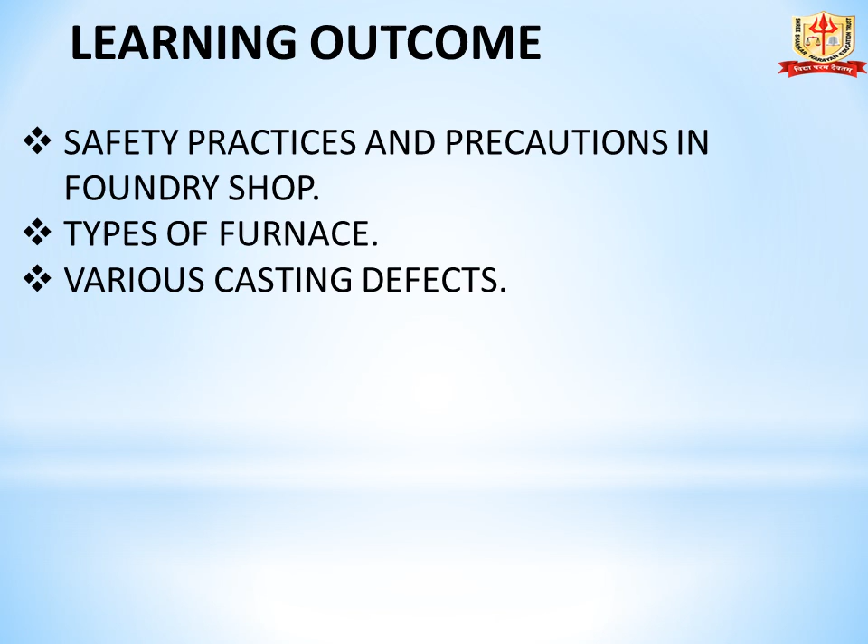Today we see the third chapter, Casting Processes and Plastic Molding, Part 4. Learning Outcome: after watching this video, you should be able to know safety practices and precautions in foundry shop, different types of furnaces, and various casting defects.

In this slide we study safety practices and precautions in foundry shop. First precaution is use personal protective equipment: use heavy cotton suit to protect against hot gases, dust and burn, use safety shoes, and workers should always wear full face shield and safety glasses to reduce or eliminate the risk of eye or face injury.

Second precaution you should take is reduce impurities in metal. Molten metal emits fumes, and any impurity on the surface of the molten metal increases the risk of breathing problems. So metal used should be in a pure form. Impurities also increase the dross that must be removed, thereby increasing the workers' exposure to harmful substances.

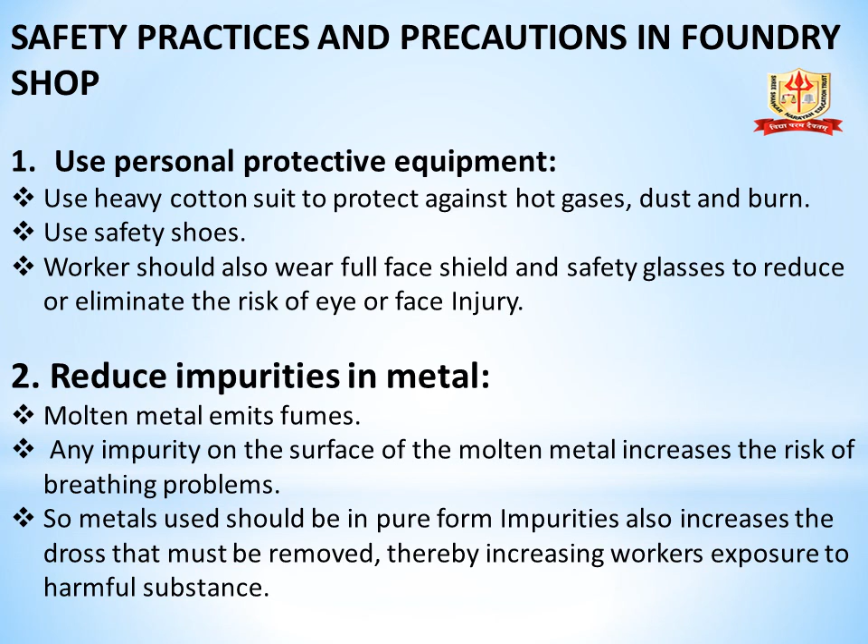Third safety practice is know your melting. Different metals have different characteristics like melting temperature. Alloy elements like lead, zinc, mercury, beryllium are especially dangerous. It is better to know the health risks associated with handling these elements before exposure happens, so take all necessary precautions before handling them.

Fourth point, inspection. Check the condition of equipment, condition of furnace wall, fuel lines, burners and pouring equipment regularly and do the periodic maintenance of it.

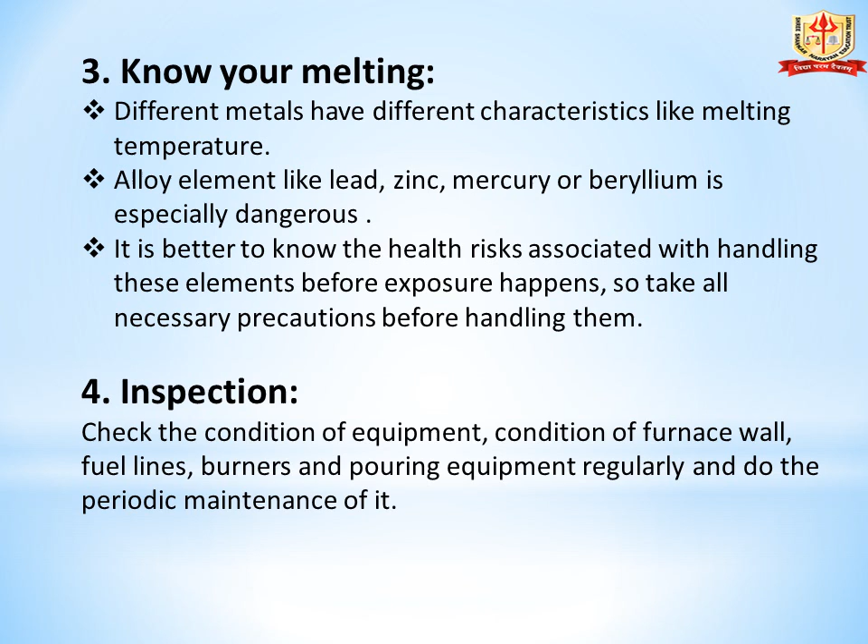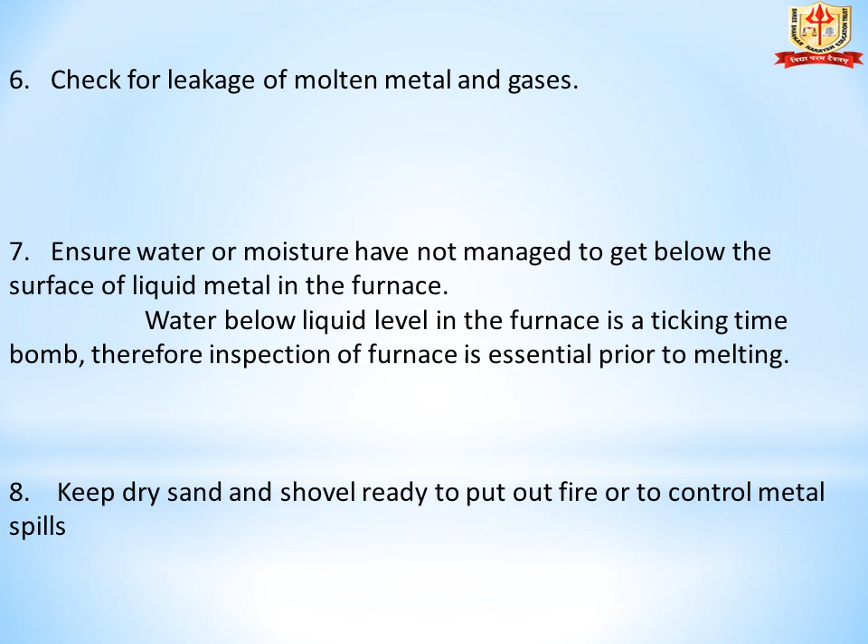Point number 6, check for leakage of molten metal and gases. Point number 7, ensure water or moisture has not managed to get below the surface of liquid metal in the furnace. Water below liquid level in the furnace is a ticking time bomb, therefore inspection of furnace is essential prior to melting. Point number 8, keep dry sand and shovel ready to put out fire or to control metal spills.

Next safe practice, point number 9 is first aid. Despite the best planning, precaution and care, sometimes accidents happen. It is advisable to be prepared for the worst. Basic first aid may need to be administered before help arrives. The workplace must have a working phone to call for emergency services.

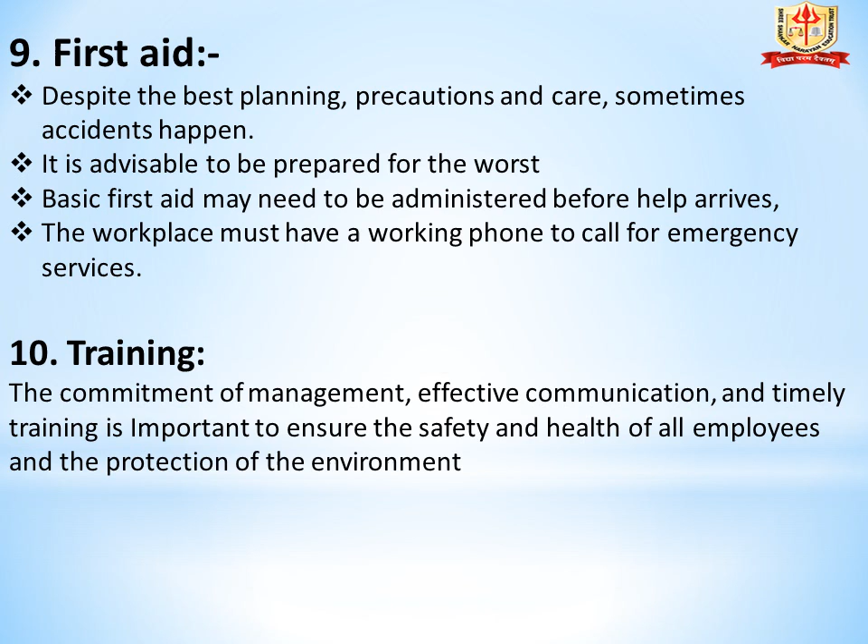Point number 10 is training. The commitment of management, effective communication and timely training is important to ensure the safety and health of all employees and the protection of the environment.

Next point is melting processes. The selection of furnace depends on following factors: temperature of molten metal required, rate of molten metal required per hour, method of metal pouring, and economical considerations such as initial cost, running cost, fuel cost, etc.

Point number 5, cleanliness and noise level. Point number 6, quantity of metal to be melted at a time. These are some factors by which melting processes are selected.

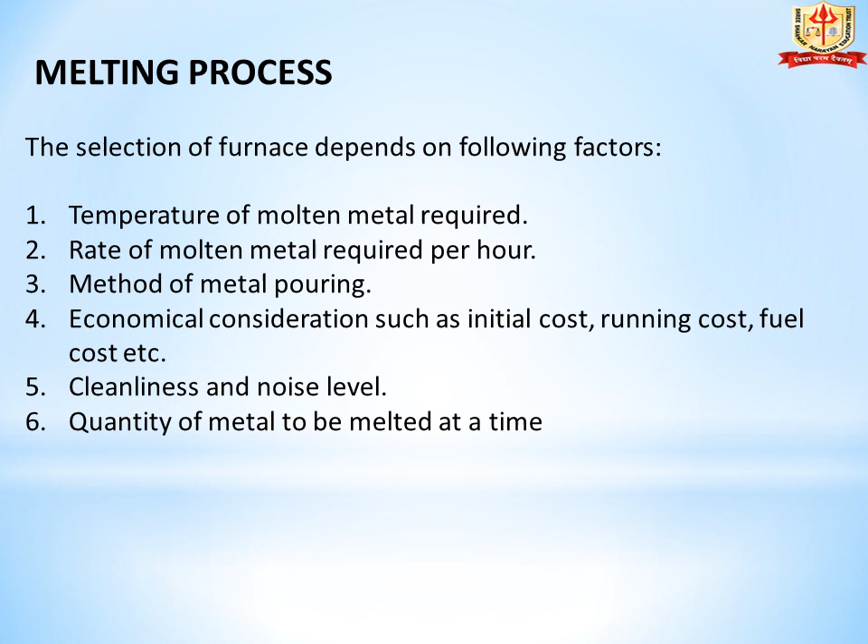Now we see types of furnaces. For remelting metal in foundries, the following furnaces are used: first is a crucible furnace, which includes pit furnace (coke fired furnace) and tilting furnace (oil and gas fired), second is metal pot furnace, and third is a cupola furnace.

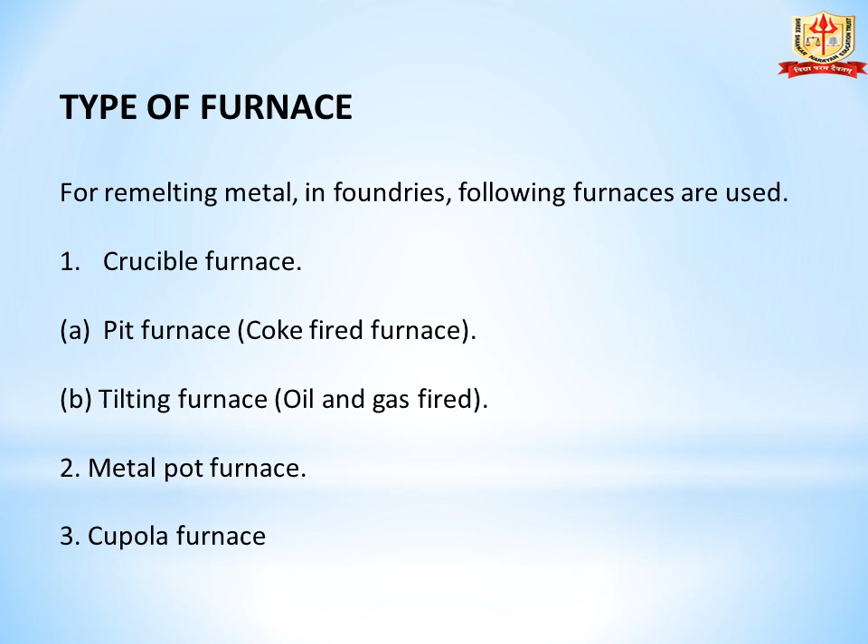Now we see cupola furnace. Cupola is a furnace in which pig iron along with scrap is melted and iron castings are prepared. Cupola furnace is simple in construction and operation, continuous in operation, economical in working and gives high output.

Now we see construction of cupola furnace. The cupola furnace consists of a vertical shell built up of steel plate about 8 mm thick, lined with refractory fire bricks. It rests on a circular plate which is supported above the floor by 4 cast iron legs, suitably spaced so that the hinge bottom door or drop bottom can swing freely. The door is held in horizontal position by a vertical prop, and it can be dropped to empty the furnace.

The charging door is located about halfway up the vertical shell, and the top is covered with a metal cover or spark arrestor. A little above the bottom, a circular compartment called a wind box is provided. The blast pipe enters this box which forces the air completely around the wind box from blower by means of wind pipe. A number of tuyeres are provided in the wind box to supply air to the furnace.

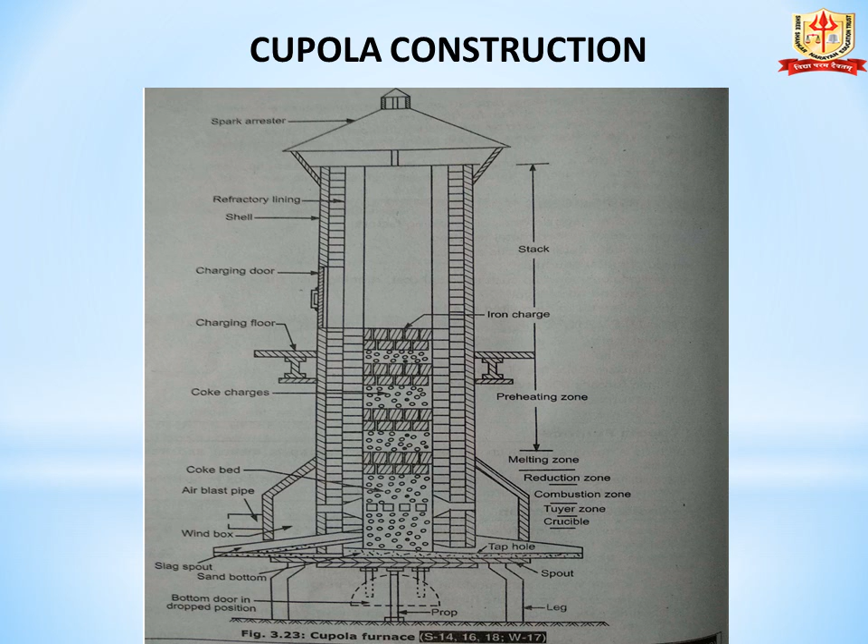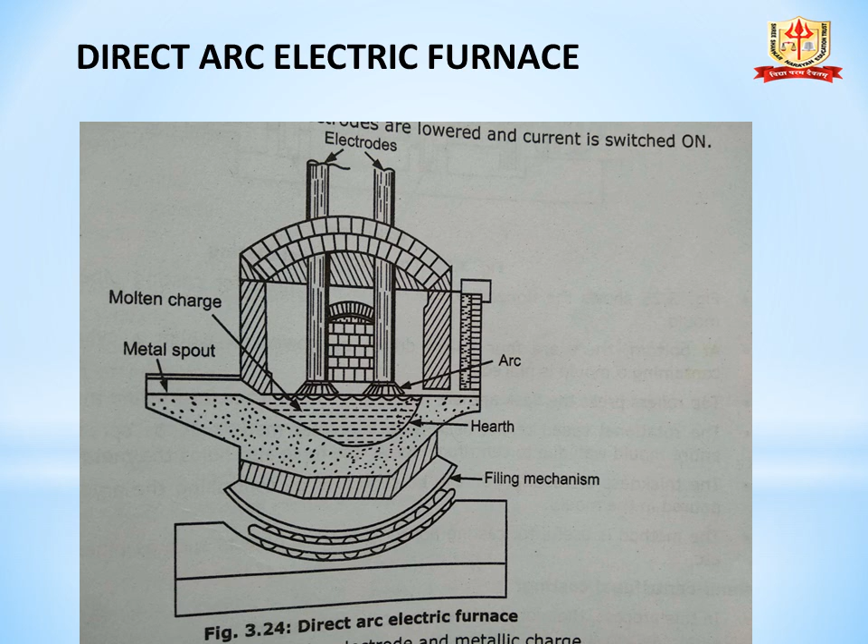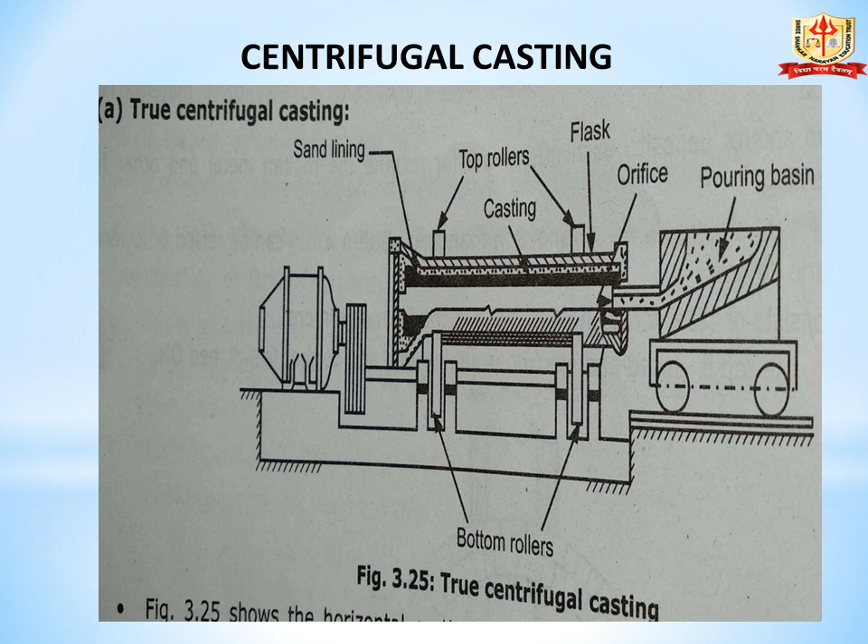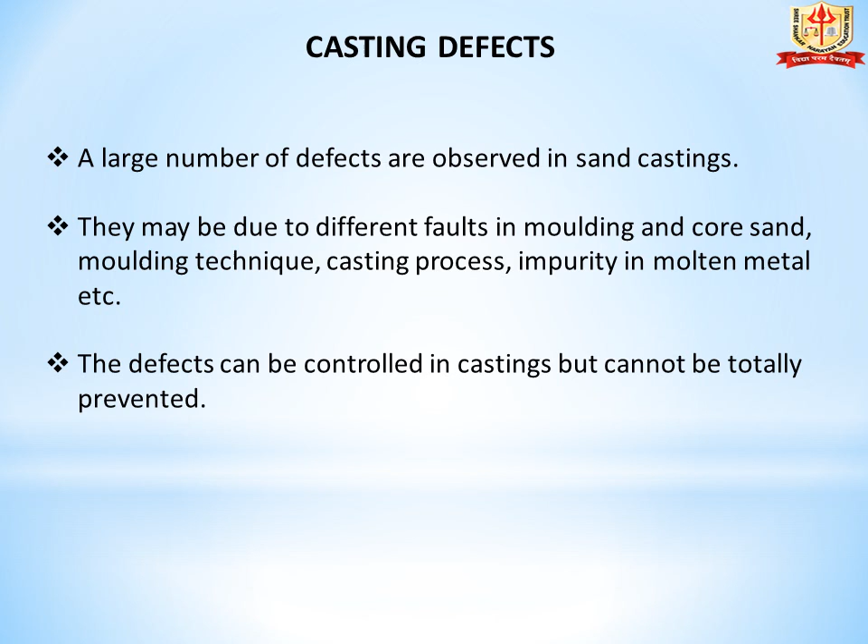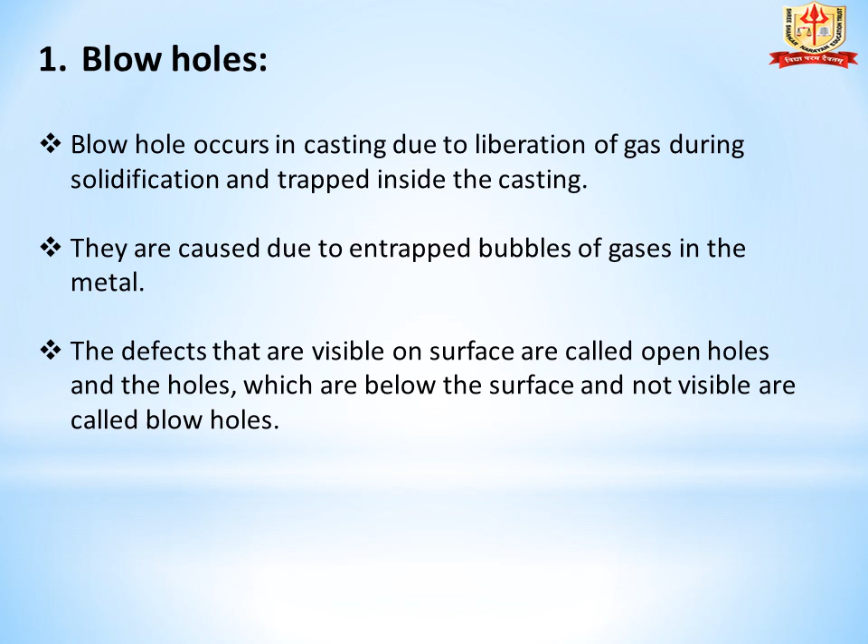The first defect is blowholes. Blowholes occur in a casting due to liberation of gas during solidification which gets trapped inside the casting. They are caused due to entrapped bubbles of gases in the metal. The defects that are visible on the surface are called open holes, and the holes which are below the surface and not visible are called blowholes.

There are probable causes for blowholes. First cause is excessive moisture. Second cause, low sand permeability. Third cause is fine sand grains. Fourth cause is improper venting of mold. Fifth cause is excess use of organic binders. Sixth cause is too hard ramming. And seventh cause is presence of gas producing ingredients.

For these probable causes, there are suggested remedies. First remedy is control of moisture content. Second, use of rust-free chills, chaplets and clean inserts. Third, bake core properly. Fourth, ram the mold less hard. And fifth, provide adequate venting in mold and cores.

If you use these suggested remedies, we cannot avoid blowholes 100%, but we can avoid them in a proper way.

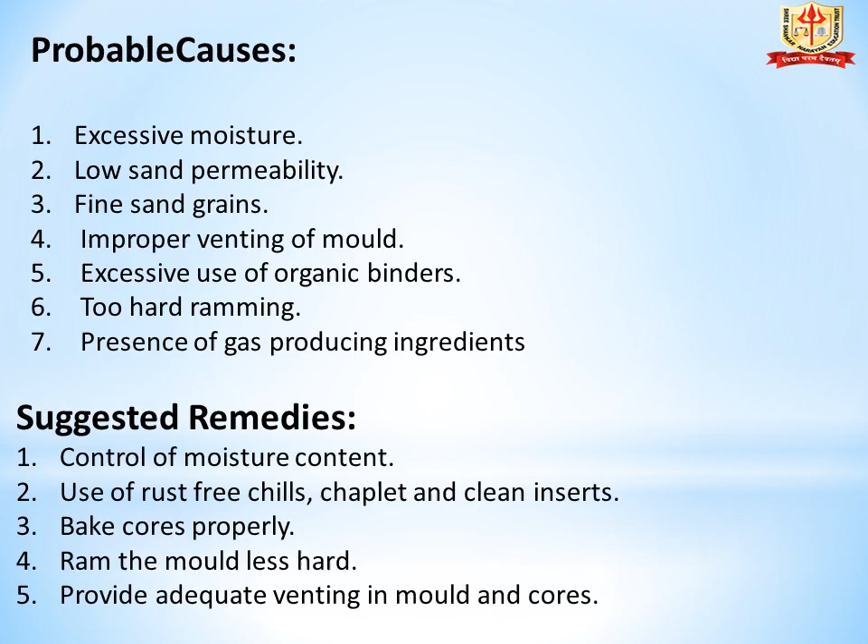Second defect that occurs in a casting is dirt. These are particles of dirt and sand embedded in a casting surface. It is due to improper handling of mold, presence of sand and slag particle in the molten metal, etc.

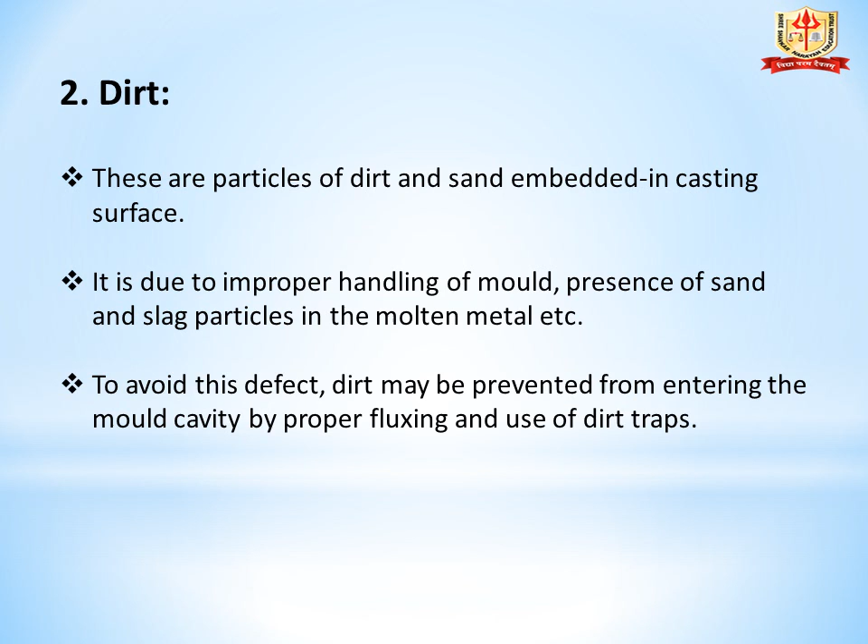To avoid these defects, dirt may be prevented from entering the mold cavity by proper fluxing and use of dirt traps.

Probable causes for dirt are: first, faulty gating; second, faulty pouring; third, inferior molding or coarse sand; fourth, soft ramming of mold; and fifth, rough handling of mold and core.

Suggested remedies for these defects are: first, modify gating system; second, improve pouring to minimize turbulence; third, use superior sand of good strength; and fourth, provide hard ramming. These are the suggested remedies for this casting defect.

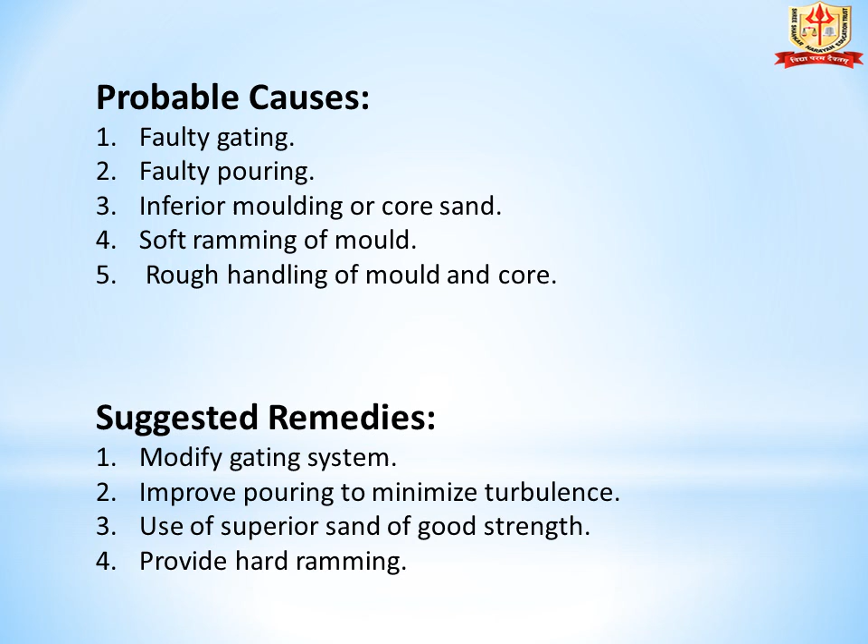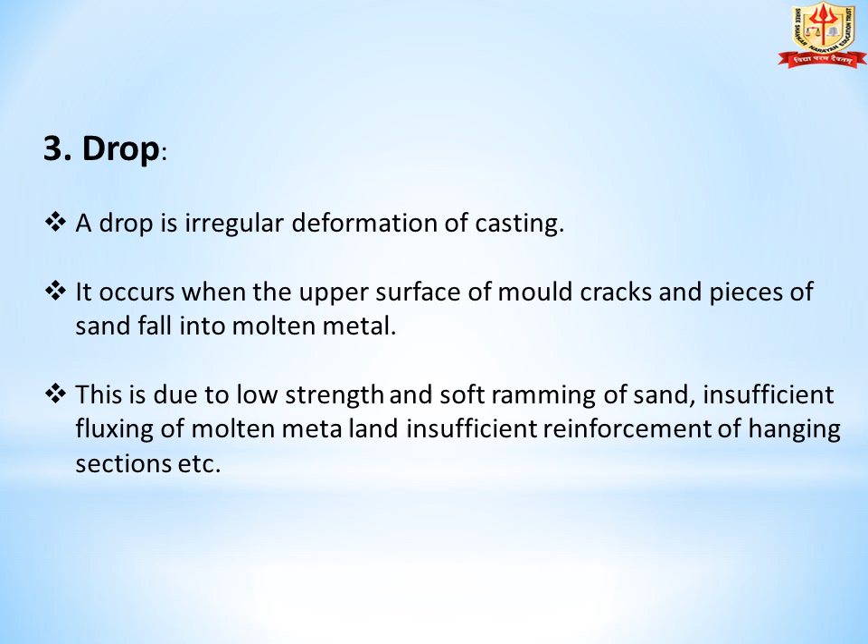Next casting defect is drop. A drop is irregular deformation of casting. It occurs when the upper surface of the mold cracks and pieces of sand fall into the molten metal. This is due to low strength and soft ramming of sand, insufficient fluxing of molten metal, and insufficient reinforcement of hanging section, etc.

Probable causes for the defect are: first, low green strength in molding sand and core; second, too soft ramming; third, inadequate reinforcement of sand and core projection. Suggested remedy is: first, increase green strength of sand mold; and second, provide harder ramming.

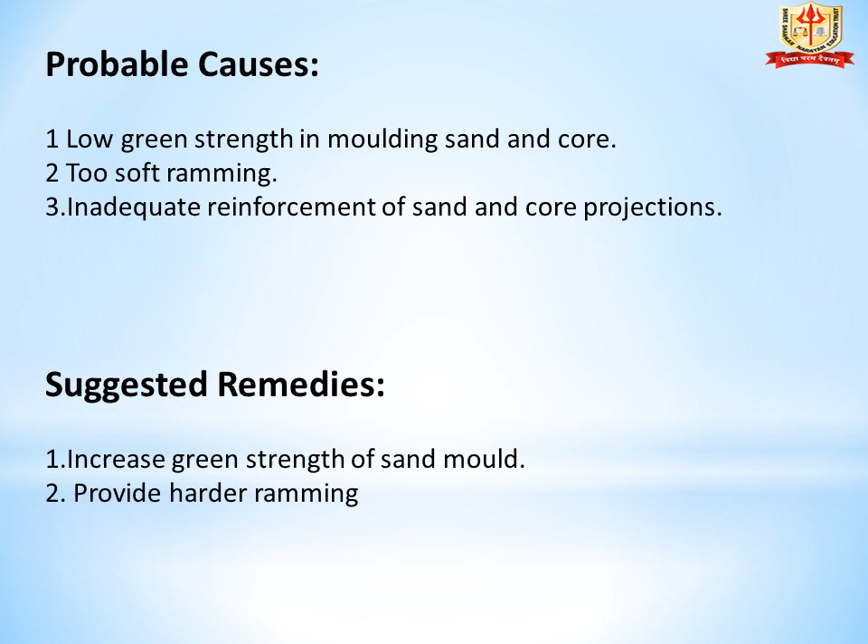Next defect is shift. It is a misalignment of top and bottom parts of mold. These defects occur at the parting line. It results in mismatch of the casting, incorrect dimension, or incorrect location of holes. Shift is caused by misalignment of flasks, cores, etc.

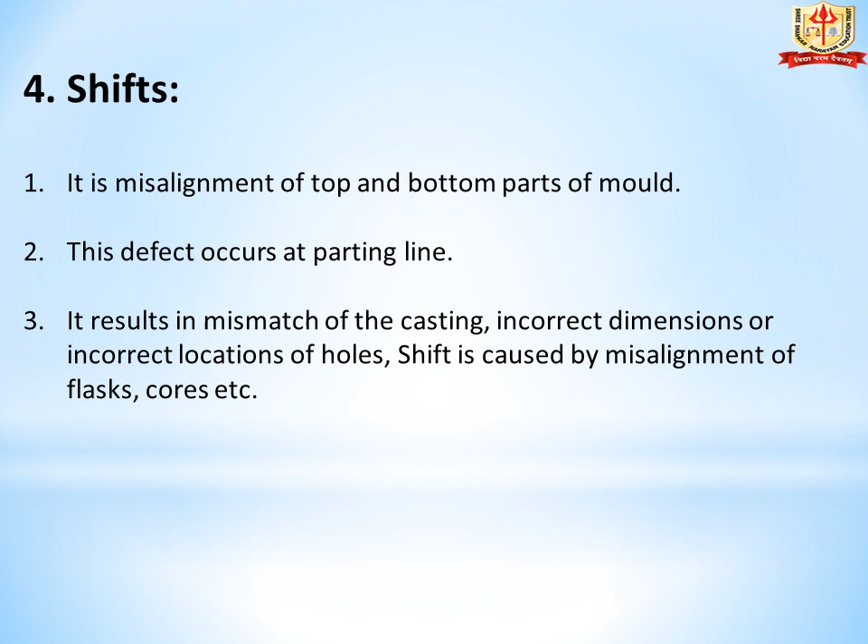Probable causes for these defects are: first, worn out or bent clamping pins; second, misalignment of two halves of pattern; third, improper support of core.

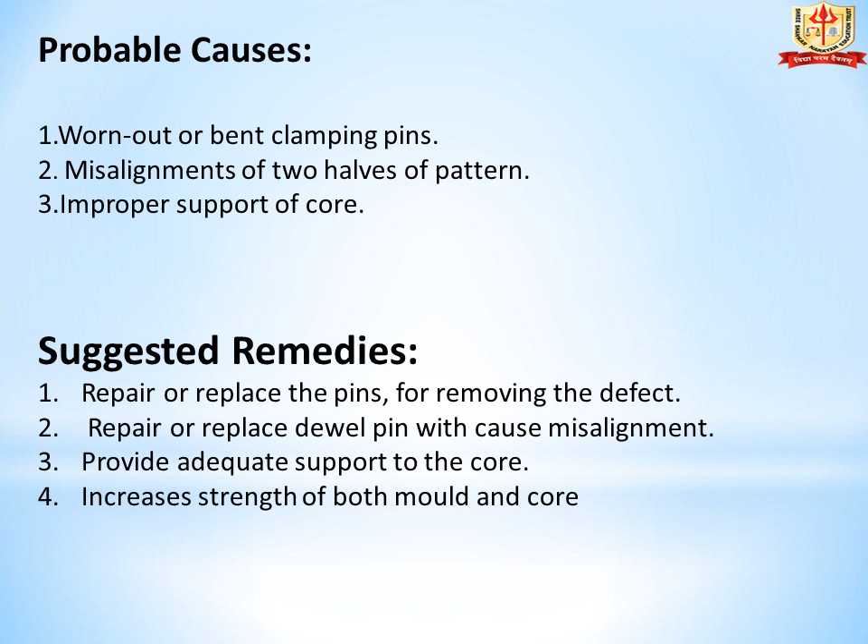Suggested remedies for this defect are: first, repair or replace the pins for removing the defect; second, repair or replace the dowel pin which causes misalignment; third, provide adequate support to the core; and fourth, increase strength of both mold and core. These are such remedies for this defect.

Next defect that occurs in casting processes is warpage. These defects occur during or after solidification. It is unintentional and undesirable deformation in a casting. Due to different rate of solidification in different sections of a casting, stresses are set up in adjoining walls, resulting in warpage in this area.

Large and flat sections or intersecting sections such as ribs are prone to warpage. To prevent warpage, produce large areas with wavy, corrugated construction, or add sufficient ribs or rib-like shapes to provide equal cooling rates in all areas.

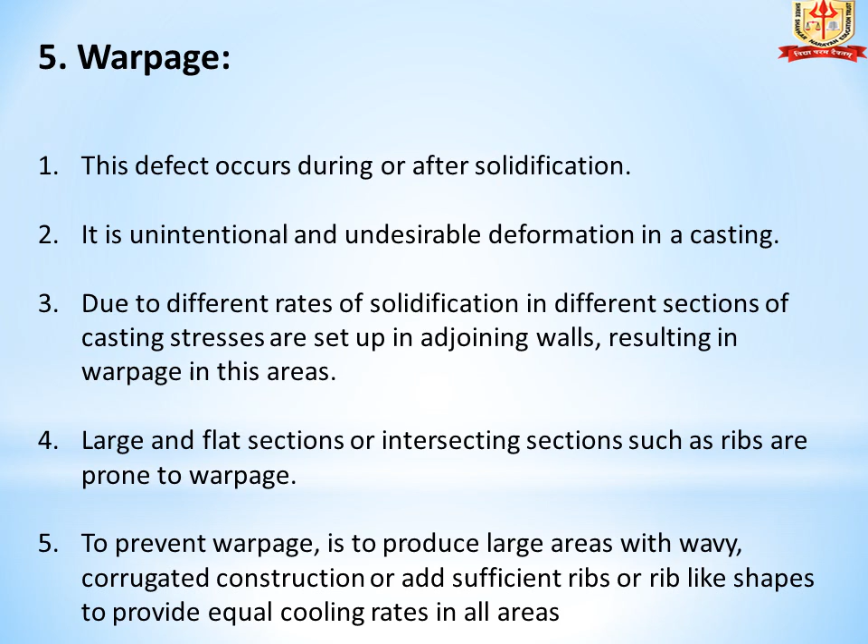Probable causes for this defect are: first, continuous large flat surface on casting indicating a poor design; second, no dimensional solidification of casting. Suggested remedies are: first, follow principle of sufficient directional solidification; second, make good casting design.

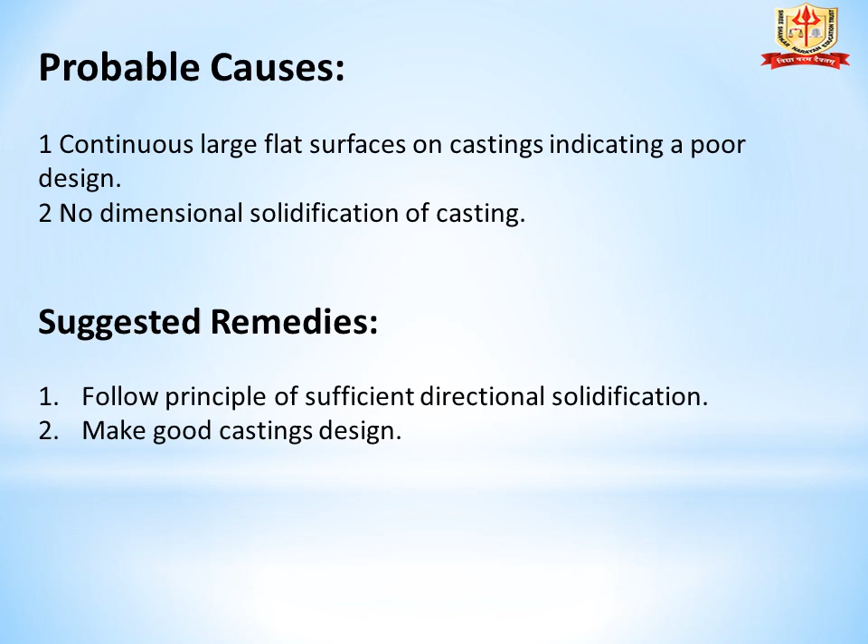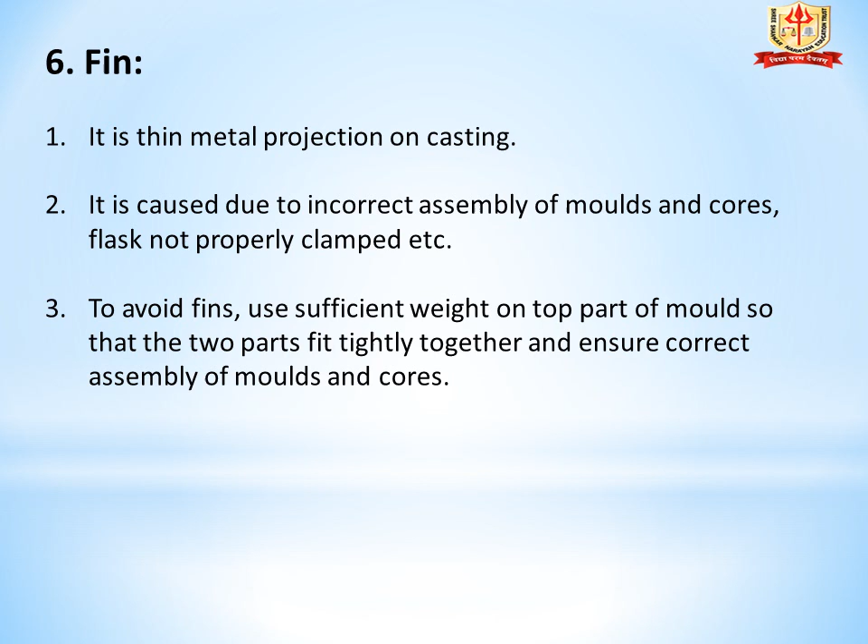Next defect is fin. It is a thin metal projection on casting. It is caused due to incorrect assembly of molds and cores, flask not properly clamped, etc. To avoid fin, use sufficient weight on the top part of mold so that the two parts fit tightly together, and ensure correct assembly of mold and cores.

Probable cause for this defect is: first, misalignment of molding box; second, incorrect clamping of molding box. Suggested remedies: first, ensure correct assembly of molding box; second, place weight on top of molding box.

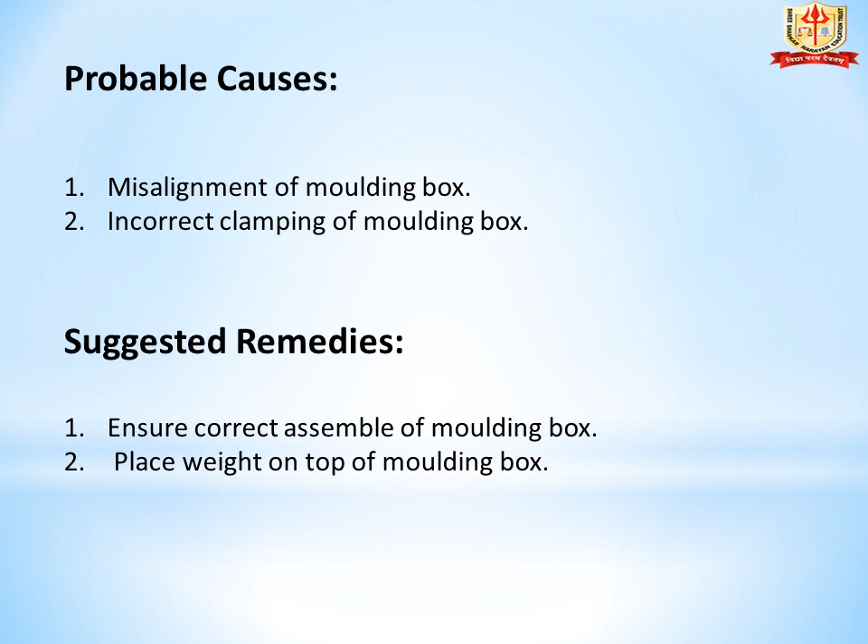Next defect is misrun or cold shut. Misrun occurs when molten metal fails to fill the entire cavity of the mold. An incomplete casting results in a misrun. A cold shut is formed due to imperfect fusion of two streams of metal in the mold cavity, or unequal sections of a pattern assembled together.

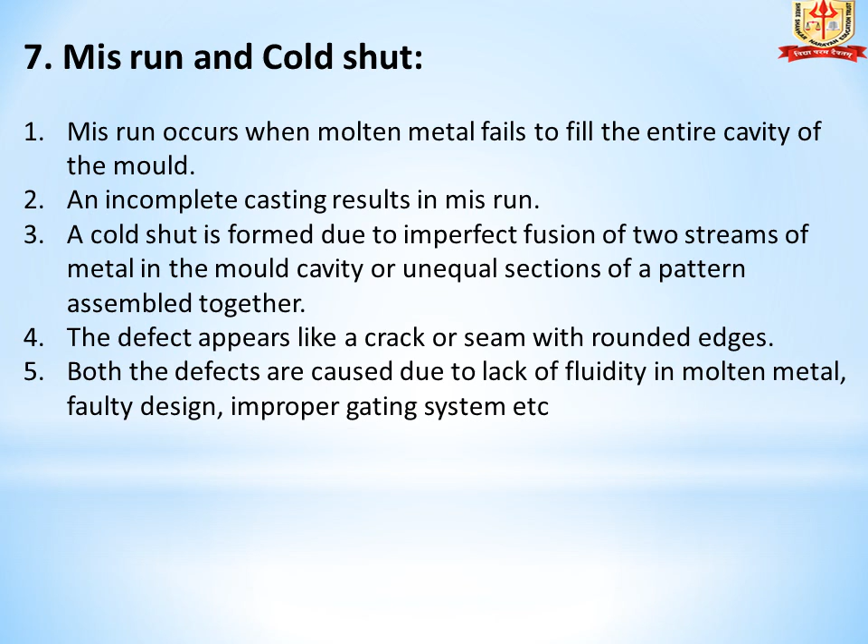The defect appears like a crack or seam with rounded edges. Both defects are caused due to lack of fluidity in molten metal, faulty design, improper gating system, etc.

Probable causes for this defect are: first, lack of fluidity in molten metal; second, faulty design; third, faulty gating. Suggested remedies are: first, adjust proper pouring temperature; second, modify design; third, modify gating system.